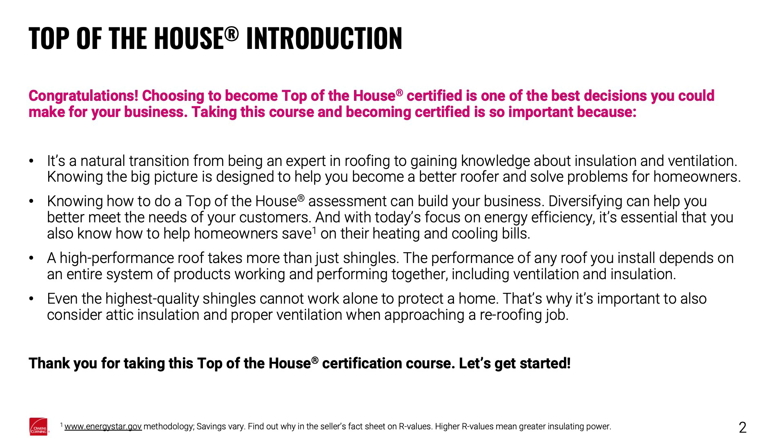Thank you for taking this Top of the House certification course. Let's get started. Let's review the training agenda and the items we will cover.

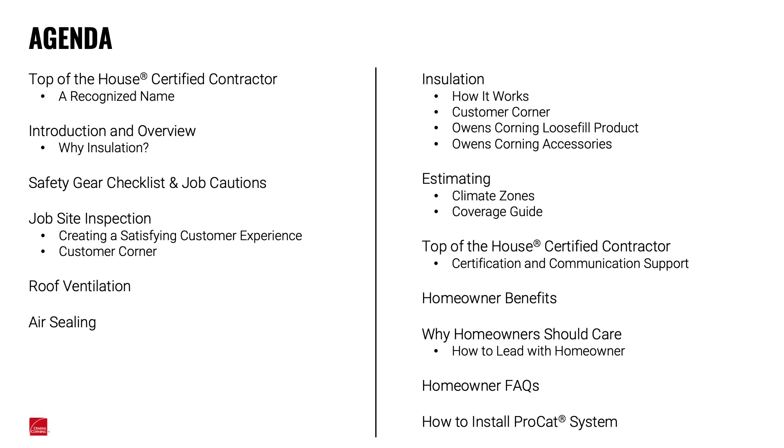Top of the House Certified Contractor. Introduction and Overview. Safety gear checklist and job cautions. Job site inspection. Roof ventilation. Air sealing. Insulation. Estimating. Top of the House Certified Contractor. Homeowner benefits. Why homeowners should care. Homeowner frequently asked questions. How to install ProCat system.

Top of the House Certified Contractor is a recognized name in the industry. Owens Corning has been a recognized leader in the building materials industry for over 70 years. We're known for making homes comfortable, beautiful, and durable.

Fast facts. In 2021, the Owens Corning insulation business earned the National Preferred Partner Award in David Weekley Homes' 17th annual survey for the 9th consecutive year. Owens Corning is a Fortune 500 company with nearly $8.5 billion in annual sales as of 2021. Owens Corning services 33 countries and 6 continents and employs 20,000 people. The company's Corporate Science and Technology Center in Granville, Ohio, is focused on innovative research and development.

At Owens Corning, customer satisfaction is a priority.

Introduction and Overview. Why insulation? It's essential for a home's roof, ventilation, and insulation to work together. As a home's energy efficiency increases, its energy demand for heating and cooling decreases. A paired system increases a roof's longevity by adding to the life of shingles, preventing moisture and ice dams.

PINK FIBERGLAS insulation products are GREENGUARD and GREENGUARD Gold for better indoor air quality. Energy used in homes and buildings is the number one source of greenhouse gas emissions. And in an under-insulated home, most of the home's heat escapes through the attic. Adding insulation to the attic is one of the easiest and most cost-effective ways to improve energy efficiency. Plus, it helps reduce greenhouse gas emissions.

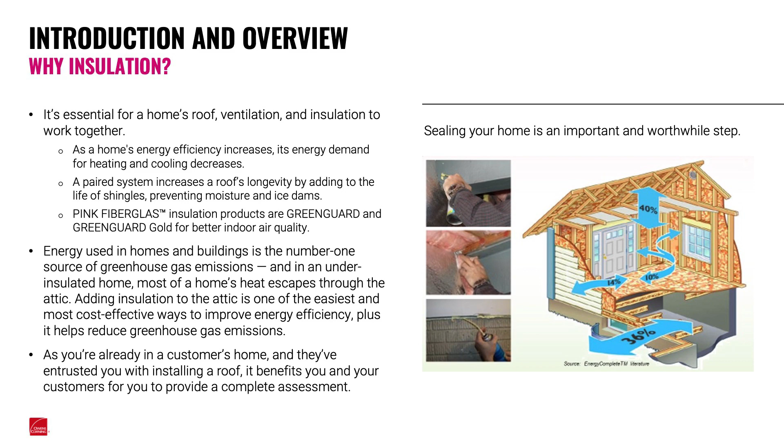As you're already in a customer's home and they've entrusted you with installing a roof, it benefits you and your customers for you to provide a complete assessment.

Safety gear checklist and job cautions. One of the most important parts of any job is to make it a safe one. As you well know, the best form of accident insurance is accident prevention.

It's paramount that you inspect each job site before the work begins for possible hazards such as overhead electrical lines or unstable ground conditions that might not adequately support ladders or scaffolding. Bring any potentially hazardous conditions to the attention of all workers before the job begins.

Required safety gear: footwear that provides good traction, such as rubber-soled shoes with good ankle support, work gloves, a loose-fitting long-sleeve shirt, and OSHA-approved safety glasses to protect your eyes from airborne particles.

A disposable dust respirator, NIOSH or MSHA approved, provides protection from fiberglass and prevents you from breathing airborne particles of insulation. A work helmet protects your head from joists, trusses, and other obstructions.

When working in the attic, walk only on the ceiling rafters or joists and not on the ceiling. Be careful of overhead obstructions and nails penetrating through the roof deck. Maintain a minimum clearance of 3 inches around any heat-generating sources, lights, flues, etc., in the attic.

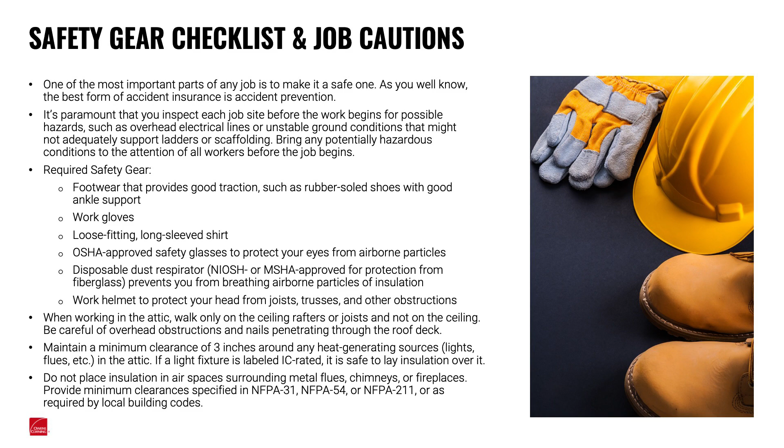If a light fixture is labeled IC rated, it is safe to lay insulation over it. Do not place insulation in air spaces surrounding metal flues, chimneys, or fireplaces. Provide minimum clearance specified in NFPA 31, NFPA 54, or NFPA 211, or as required by local building codes.

Job site inspection: creating a satisfying customer experience. Roofs can hide many secrets. Inspection of the underside of the roof is an important step in the professional installation of a new roof.

Ask the homeowner to allow you to inspect the attic. This will enable you to spot any areas of concern that could jeopardize the warranty of the roofing system installed, and provide an opportunity to see how well the attic is insulated. As a re-roofing job is done, you should always inspect the attic before starting the job.

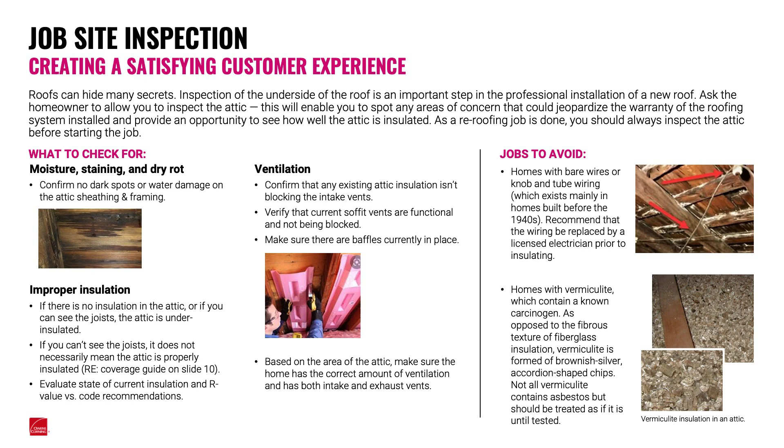What to check for: moisture, staining and dry rot, improper insulation, ventilation. Jobs to avoid: bare wires and knob and tube wiring, and homes with vermiculite, which contains a known carcinogen.

Job site inspection: customer corner. Review findings with the homeowner.

Present your findings to the homeowner along with some photos to show the condition of the attic, since they may not have been up there recently. Be sure the homeowner understands that this is done as part of the re-roofing process, not an attempt to sell them unnecessary services. Proper attic condition is important for the performance of every roof.

Important tips for talking with your customers about the value of a complete roofing system. Insulation and ventilation are key components of maintaining proper conditions in the attic and on the roof deck. In an under-insulated home, the majority of heat escapes through the attic. Adding insulation is one of the easiest and most cost-effective ways to improve energy efficiency, and it also helps reduce greenhouse gas emissions. That's another reason why pink is green.

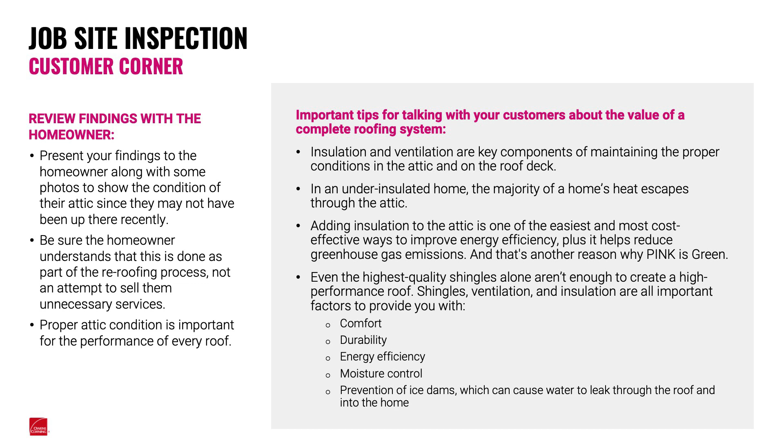Even the highest quality shingles alone aren't enough to create a high-performance roof. Shingles, ventilation, and insulation are all important factors that provide comfort, durability, energy efficiency, moisture control, and prevention of ice dams, which can cause water to leak through the roof and into the home.

Ventilation introduction and overview. What's the goal? Help protect the life of the roof, regulate attic temperature, minimize moisture and prevent mold, meet building code requirements, help prevent winter ice dams, and meet extended warranty requirements.

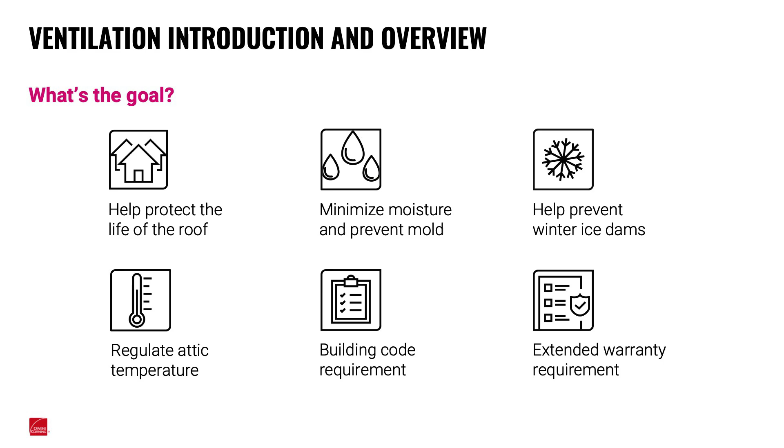Roof ventilation: attic ventilation is an important part of roofing. Proper attic ventilation extends the life of the roofing system by minimizing potential moisture concerns and by minimizing the temperature differential between the attic and the exterior air.

Proper ventilation will remove moisture and heat from the attic. Correct ventilation can prevent, slow, or wick away condensation from the roof deck. In cold climates, correct ventilation can remove heat in the attic, reducing the opportunity for ice damming. Attic temperature should be similar to the exterior temperature when ventilation is properly functioning.

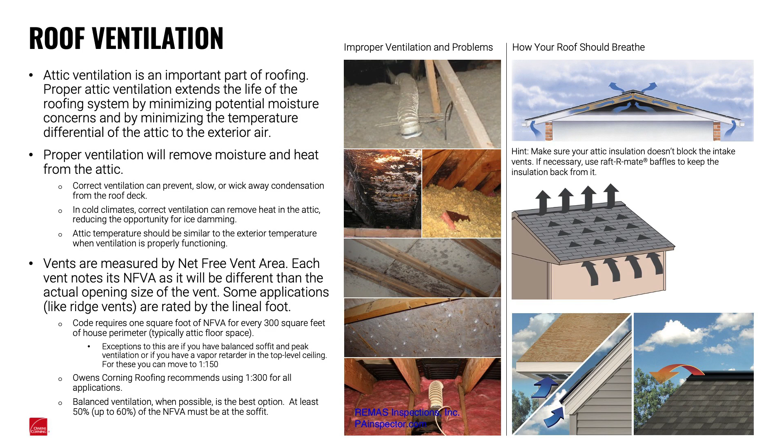Balanced ventilation, when possible, is the best option. At least 50%, up to 60%, of the NFVA must be at the soffit.

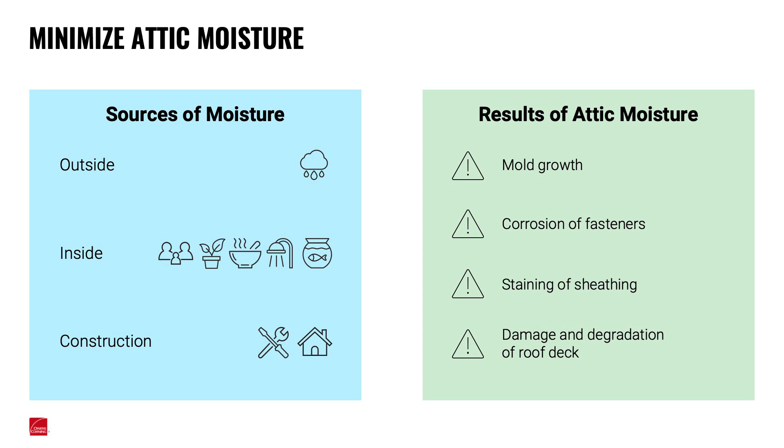Minimize attic moisture. Some sources of moisture include outside, inside, and construction. Some results of attic moisture include mold growth, corrosion of fasteners, staining of sheathing, and damage and degradation of the roof deck.

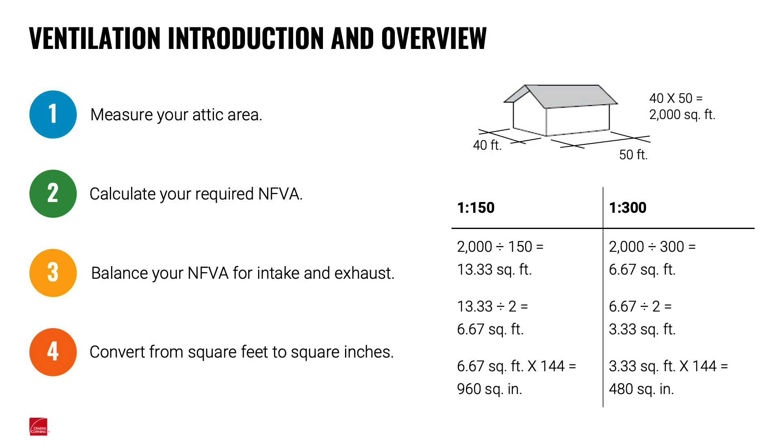Ventilation introduction and overview. Follow these steps to determine your attic ventilation: measure your attic area, calculate your required NFVA, balance your NFVA for intake and exhaust, and convert from square feet to square inches. Reference the calculation example to the right.

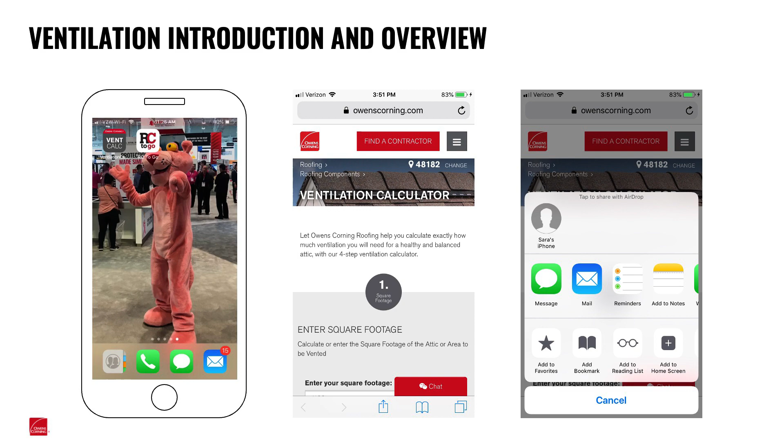Ventilation introduction and overview. Here's a look at the Owens Corning Vent Calculator. For more information, visit owenscorning.com.

Air sealing: with nearly a mile of joints on a typical house that connect the inside to the outside, proper air sealing is a critical step in the process of insulating your home.

Some main areas of the home to be air sealed include open shafts or chases, can lights, attic access covers, whole house fans, and pull-down stairs. Some benefits of air sealing include comfort, energy savings, indoor air quality, reduced moisture entering the attic, and reduced noise.

Breakout of good, better, best air sealing theory. Good: air seal attic hatches and open chases, including air sealing areas below where there is damage to the roof sheathing or framing, and properly venting any exterior exhaust ducts.

Better: removing all existing insulation to allow for air sealing. This includes what is listed as good theory, in addition to sealing all visible penetrations through the ceiling, including electrical boxes, wires, and tops of interior walls.

Best: includes good and better theory, in addition to sealing any leaks in supply and return ducts. Best theory will provide peak performance and longevity of the HVAC system.

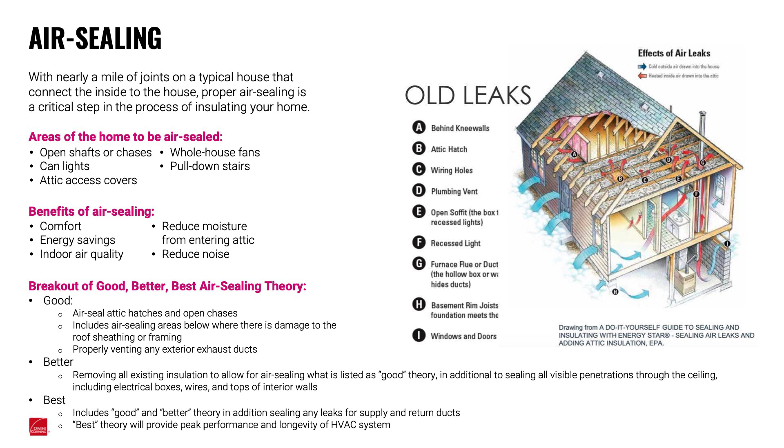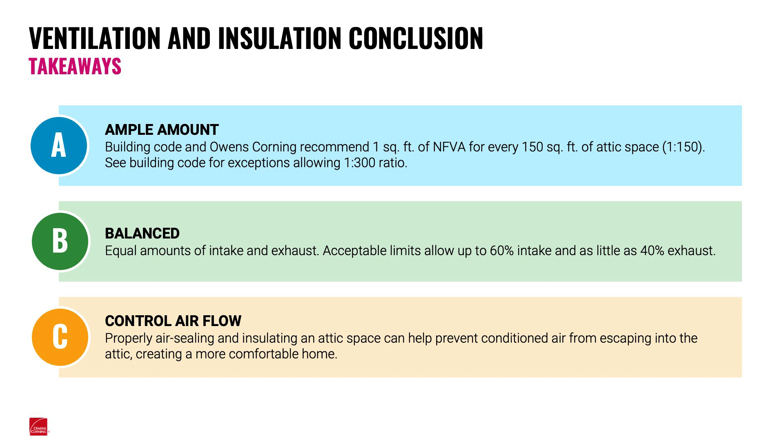Ventilation and insulation conclusion. Takeaways: ample amount of airflow, balanced intake and exhaust, and lastly, control airflow.

Insulation: how it works. Fiberglass insulation works by trapping air within tiny pockets to resist the transfer of heat, so it doesn't move into or out of the house.

Insulation provides several important benefits, including maximizing the efficiency of a home's HVAC system. It can also increase comfort, reduce the homeowner's heating and cooling costs, conserve natural resources by helping the homeowner use less energy, and increase the home's resale value.

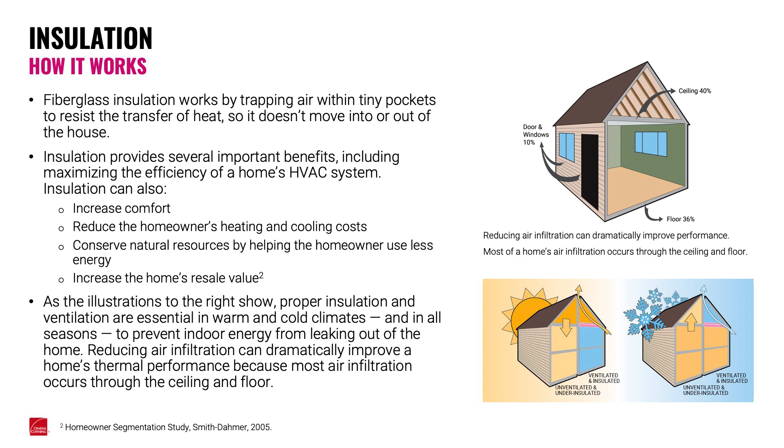As the illustrations show, proper insulation and ventilation are essential in warm and cold climates and in all seasons to prevent indoor energy from leaking out of the home. Reducing air infiltration can dramatically improve a home's thermal performance because most air infiltration occurs through the ceiling and floor.

Insulation: Customer Corner. Important tips for talking with your customers about choosing fiberglass insulation over cellulose. No health testing, hazard testing, or risk assessment evaluations have been done on cellulose insulation. In terms of health and safety testing, fiberglass insulation is one of the most tested building materials.

Cellulose insulation is made principally of shredded newspapers, which must be treated with fire-retardant chemicals to meet minimum fire safety standards. These chemicals can disappear from the insulation over time, as much as 28% in the first 2 years. Fiberglass insulation is made primarily from sand and requires no fire-retardant chemicals.

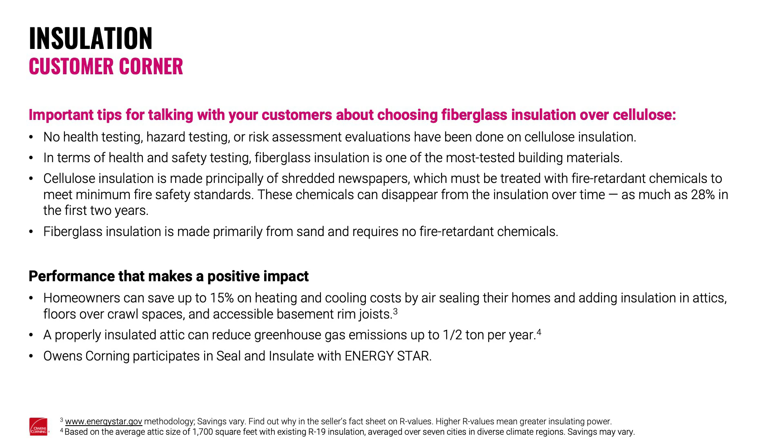Homeowners can save up to 15% on heating and cooling costs by air sealing their homes and adding insulation in attics, floors, over crawl spaces, and accessible basement rim joists. A properly insulated attic can reduce greenhouse gas emissions up to 1/2 ton per year. Owens Corning participates in Seal and Insulate with Energy Star.

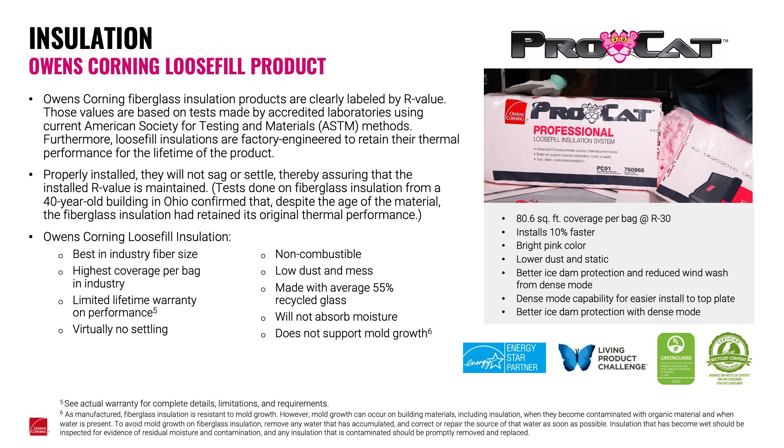Owens Corning loose-fill insulation features the best in industry fiber size, highest coverage per bag in industry, a limited lifetime warranty on performance, virtually no settling, is non-combustible, low dust and mess, made with average 55% recycled glass, will not absorb moisture, and does not support mold growth. These are the Owens Corning insulation accessories.

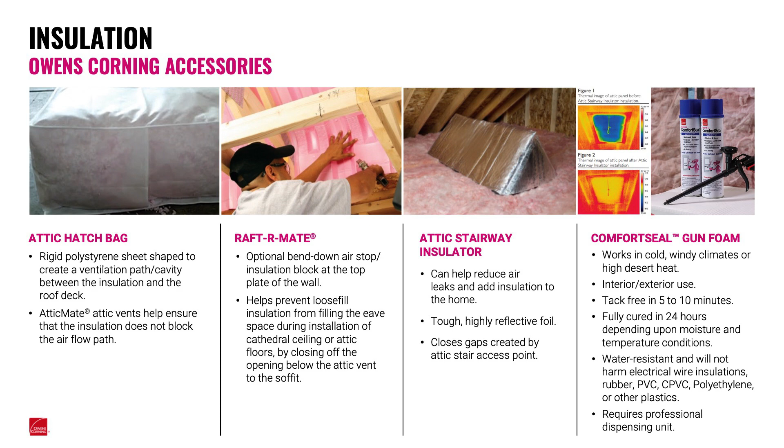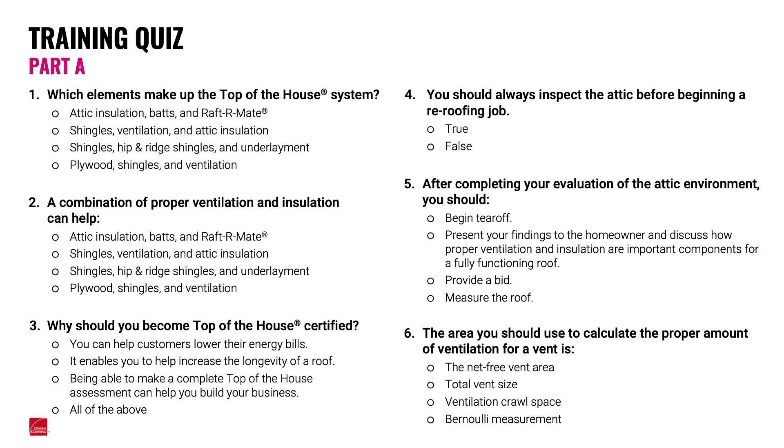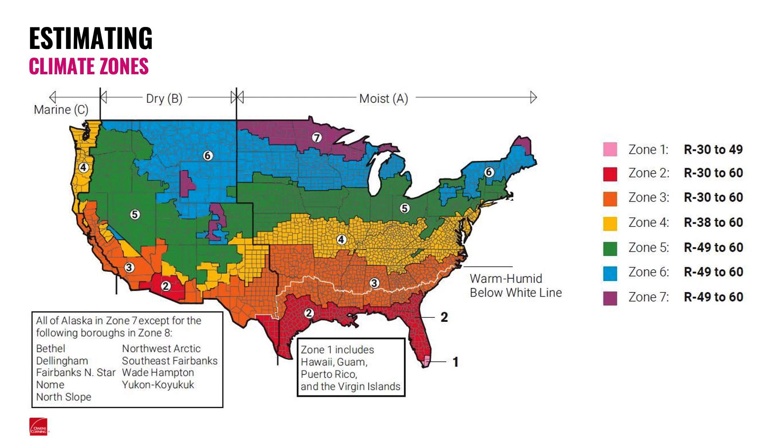Below is a visual of climate zones throughout the United States. Take a minute to identify the zone you live in and the R value codes required.

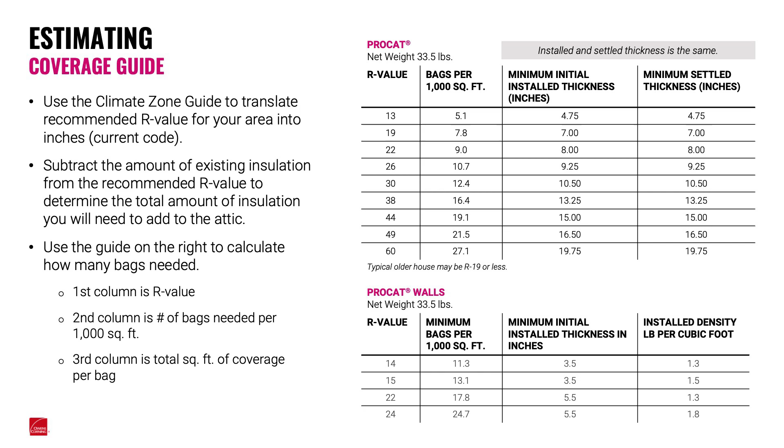Estimating coverage guide. The coverage guide can be used to determine the recommended bag quantity for your area. Please follow these steps to calculate on your own.

Top of the House certified contractor certification and communication support. You've been trained and tested by Owens Corning. This differentiates you from other roofing contractors. You've earned the Top of the House certification, so use it to your advantage when selling a remodeling job.

Trust is a major factor when homeowners are selecting a contractor. So your certification by the manufacturer, a leader in the roofing industry, is sure to bring about confidence for a job well done. Owens Corning offers tools to help you sell your top-of-the-house services.

These tools help convey the importance of the combination of roofing, ventilation, and AttiCat insulation, and provide insight regarding the AttiCat insulation application. These tools position you as a top-of-the-house expert and will assist in putting homeowners at ease, since this is a process that they likely have not experienced before.

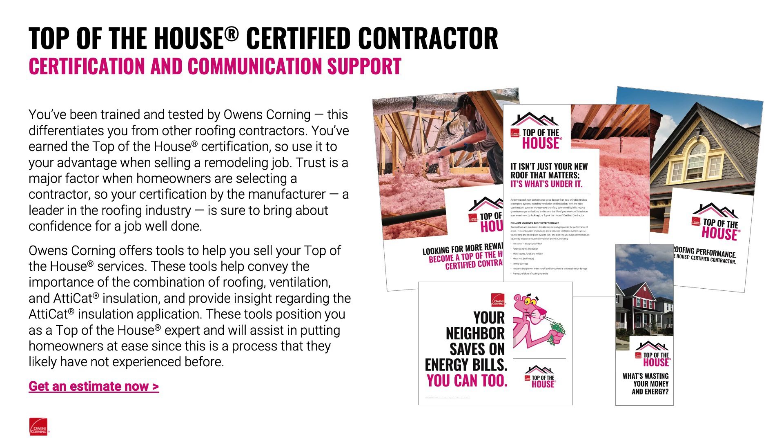Homeowner benefits: with a properly insulated and ventilated home, your customers will be able to help lower their monthly heating and cooling bills, improve their home's comfort, help protect and preserve the entire roof system - insulation, ventilation, framing, sheathing, and shingle system - and extend the life of your HVAC system.

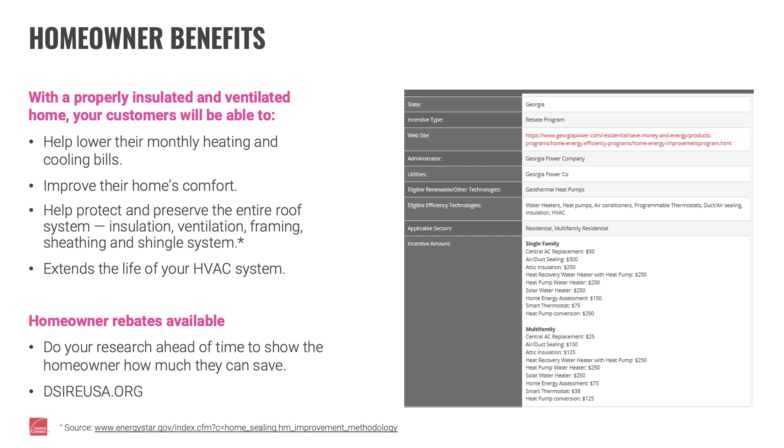Homeowner rebates available. Do your research ahead of time to show the homeowner how much they can save. Why homeowners should care, and how to lead with the homeowner.

Protecting your investment: insulation plus ventilation plus air sealing solutions will help protect against ice dams, sagging roof decks, and premature roof failures. The reduced attic moisture helps prevent potential insect infestations, mold or fungi growth, corrosion, and interior damage. Virtually no settling - the system saves money while extending the life of your home.

Non-corrosive, wellness and safety: ProCat Professional Loose-Fill Insulation will not absorb moisture. It is not a nutrient source for mold and fungi or a food source for pests.

ProCat Professional Loose-Fill Insulation meets code requirements for a Class A fire rating, flame spread 0, and smoke developed 0 when tested per ASTM E84 UL 723. Validated to be formaldehyde-free. Savings and maximizing HVAC system.

Energy savings, equipment efficiency and longevity, rebates available - a high return on investment home improvement project. Certifying your installs can add to the resale value of the home.

Convenience: work is not subbed out, one contractor completes the re-roof and insulation job. Fewer callbacks because the system is made more efficient by the insulation.

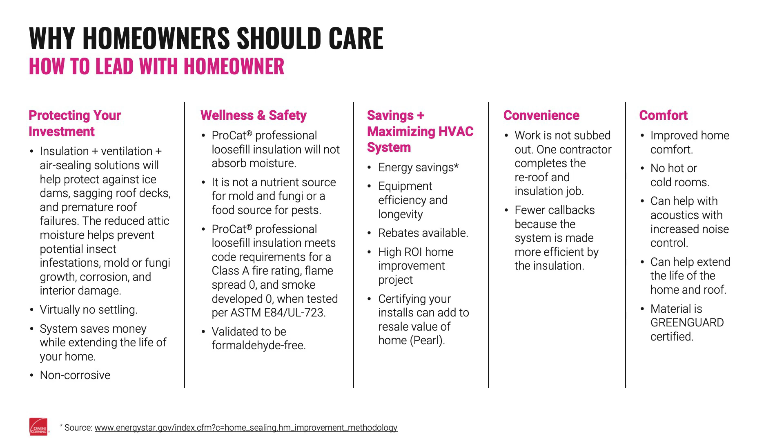Frequently asked questions: take a minute to review some frequently asked questions as well as potential homeowner objections.

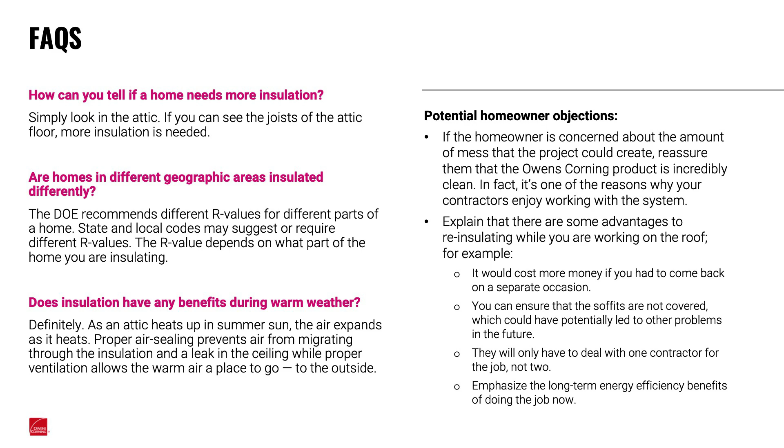How to install the ProCat system. Visit the following links for a visual demonstration on how to utilize the ProCat machine and accessories.